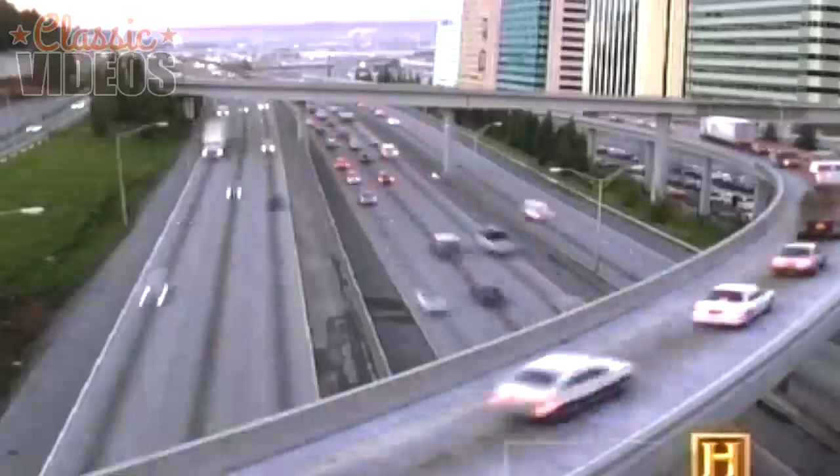If you live in a city, you drive by them every day, but you never have time to peek through the security fence. There's got to be 1,000 people working on them. How else could they go up so fast? How do they make all those parts fit? Who's responsible for what? If you always wanted to know what it feels like to straddle an I-beam hundreds of feet off the ground, or to run that massive tower crane, here's your chance to find out.

Because we're going to construct a giant of a building from the ground up. We'll see the step-by-step process, and investigate the rich history of technological innovation that got us from there to here. Because every big building today owes a debt of gratitude to the groundbreaking structures of the past.

And here, in the heart of Los Angeles, we'll meet the people who build one: tower crane operator, project architect, pipe fitter, bolt-up foreman. For these hard-hat warriors, it's time for their close-up.

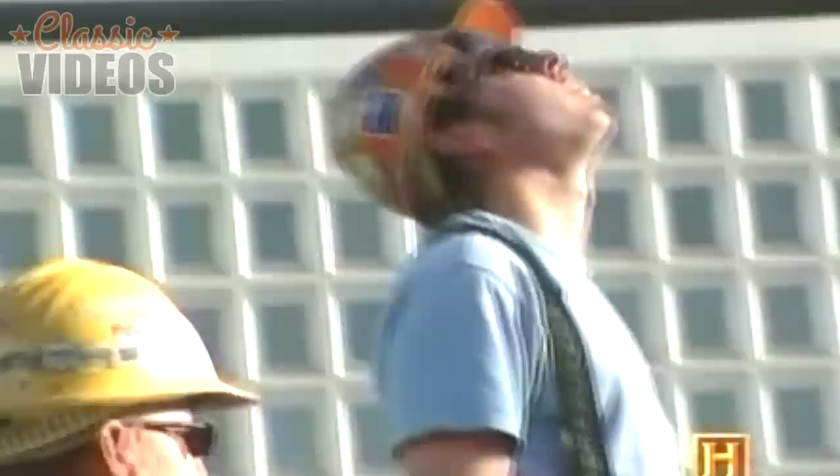It's very dangerous, very dangerous. Dangerous enough, you make a mistake, you could die. As the building's going up, there's bound to be some trouble.

Let me spell it out to you. Grab number 1 right here, put number 2 right here, so I can get 1 and 2 in order here. And here we go.

Despite the road bumps, Bobby, the man-lift operator, is on hand to lift their spirits. This is a man-lift operator's life. You're always getting loaded and you're always having your ups and downs.

From the iconic Art Deco towers of the 1920s and early 30s to the shimmering monoliths of today, skyscrapers represent more than a collection of concrete, steel, and glass. The skyscraper defines our cities. The skyscraper is a symbol of power, ingenuity, innovation, and will.

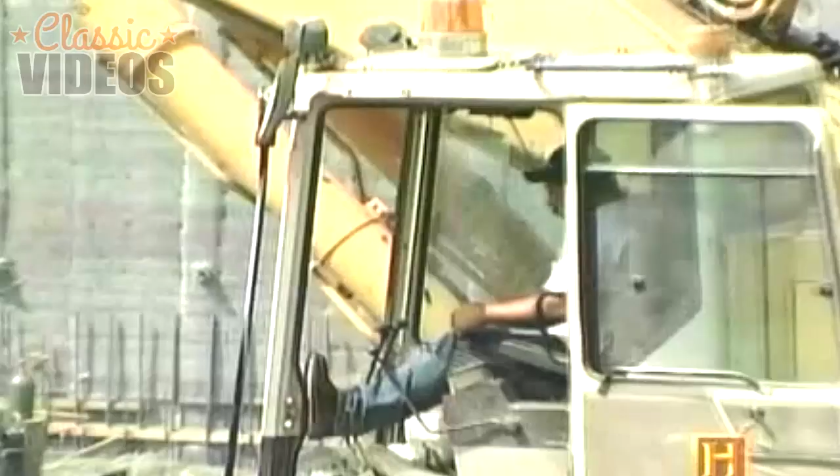A skyscraper is like a test bed. It's a place where we work out new technologies, new ideas, new construction methods as we try and build ever taller and faster and cheaper. And the structure we're building is no exception.

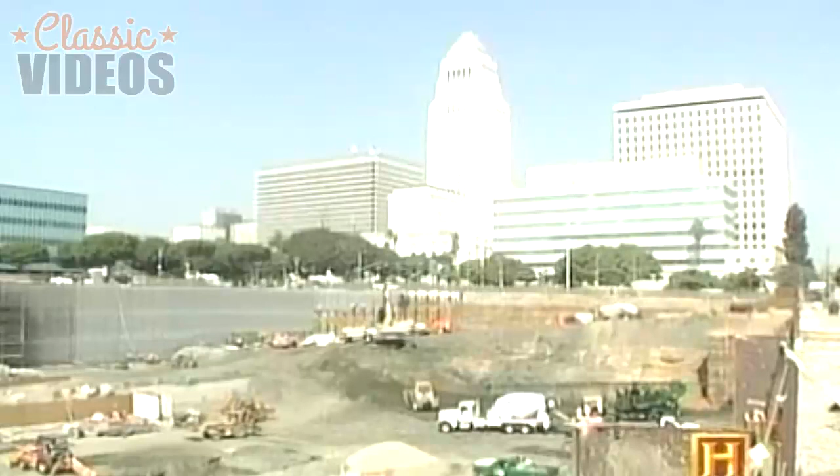In May of 2002, the Clark Construction Group, the builder and general contractor, broke ground on a $174 million project in downtown Los Angeles. The task: build a 750,000 square foot office building for the California Department of Transportation, or Caltrans. The building will take up an entire city block.

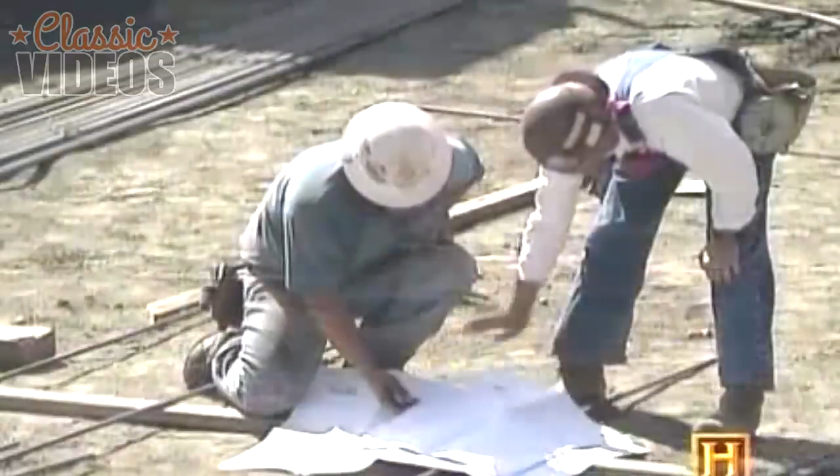And although it'll rise a relatively modest 13 stories above ground, with 4 stories of parking below the plaza level, constructing it will present the same architectural, structural, and mechanical challenges as larger buildings. Clark Construction has 27 months to complete our office building.

We have the address, the huge 100 here, but this will all be... In the fall of 2001, Thom Mayne and his design team from Morphosis Architects are in the midst of a heated competition for the Caltrans project.

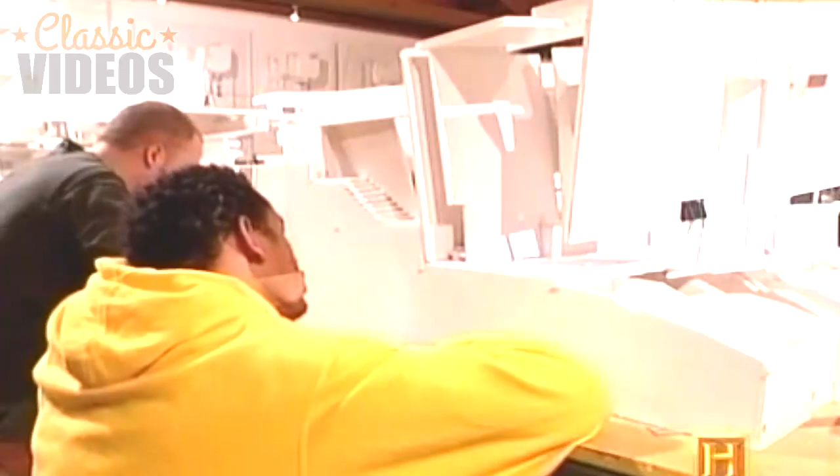You put a huge amount of energy, and I'm talking about kind of emotional energy, not just intellectual and creative energy, but you get really involved in it personally. When you're done, you can't even conceive not winning.

For any competition, the developer gives rival architects a set of parameters called a program. It might include the amount of space desired, the intended usage for that space, and the budget. It's the architect's job to take these abstract concepts and numbers and fashion them into a workable building.

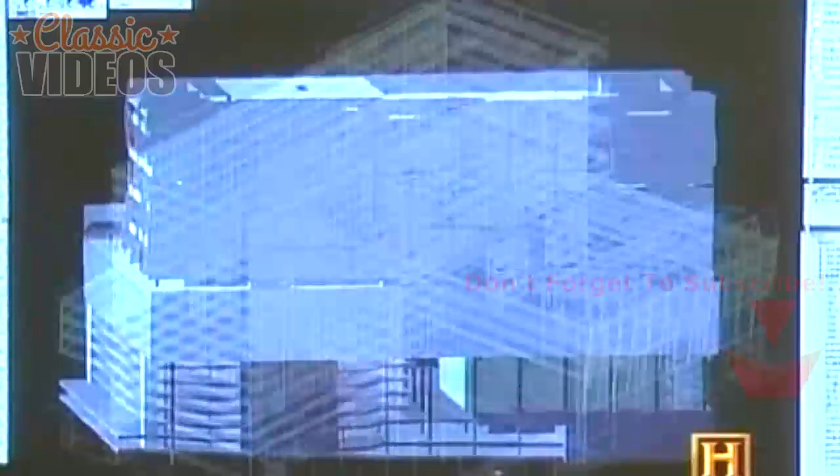Designers use every tool in their box. The image is always the architect that is drafting for it, which is kind of an old image. It's all computer now. In the computer, we can do a model and rotate the model around, see it from any angle that you want to see it from, render it or shade it, so that you can see kind of the surfaces more like you would see a traditional model.

And it doesn't have to stay in the computer. This machine can take this and that and turn it into this. It's called a 3D printer, and it works similar to your inkjet at home.

A model starts out as a heap of plaster powder, which the printer spreads into a thin layer. The print head runs back and forth across the powder, spraying glue instead of ink, creating a cross-section. When it's through with one layer, the printer drops the base a fraction of an inch, spreads another bed of powder, and sprays more glue.

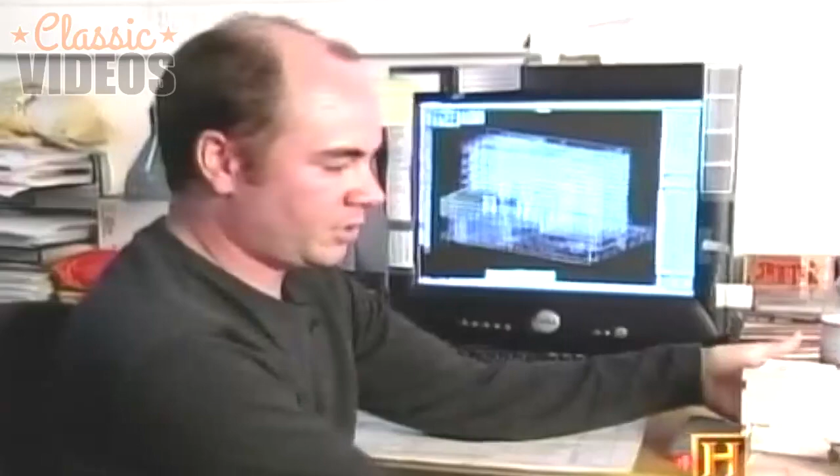Eventually you end up with a kind of cylinder of plaster that you can vacuum out the excess, and you're left with a three-dimensional model you can discuss with the team. The 3D printer quickly renders concepts, but they're just to stimulate debate. For the actual competition, designers will spend hundreds of hours making detailed models with paper, plastic, and glue.

Others on the team will work on the guts of the building. If they win the competition, Morphosis will eventually lay out every detail, every column, every window in the form of extremely detailed drawings or construction documents.

The set of documents can be 300 to 400 pages, and they're constantly changing. Designing is not just making one decision after the other, it is making a whole bunch of decisions together, and they all have to work together.

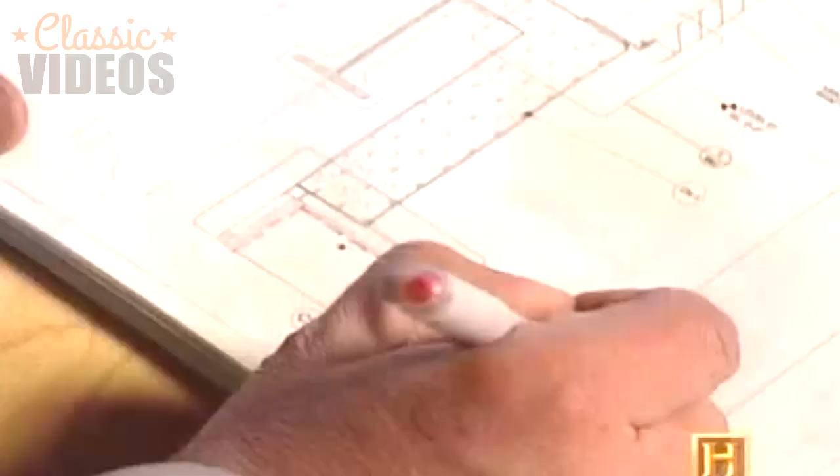Architects don't work in a self-indulgent creative vacuum. They're governed by planning codes, structural engineering limitations, the needs of the client. You can either have moving exhibits, but you're going to have a very large archive of these fine art photographs.

And, to the frustration of many architects, the budget. The architect also consults a series of additional specialists, like the structural engineer, who designs the support framework of the building, and the mechanical engineer, who figures out how to air condition the building.

Architecture, like watching a child growing. A parent can want them to go this way, and maybe a little bit this way, and maybe they go that way, and finally they're just their own person.

On November 12, 2001, Morphosis gets word from Caltrans that it has won the competition. I think it's going to be pretty interesting. Now, like any other high-rise designer, Morphosis architects have to produce the mountain of construction documents that a builder can turn into a structure.

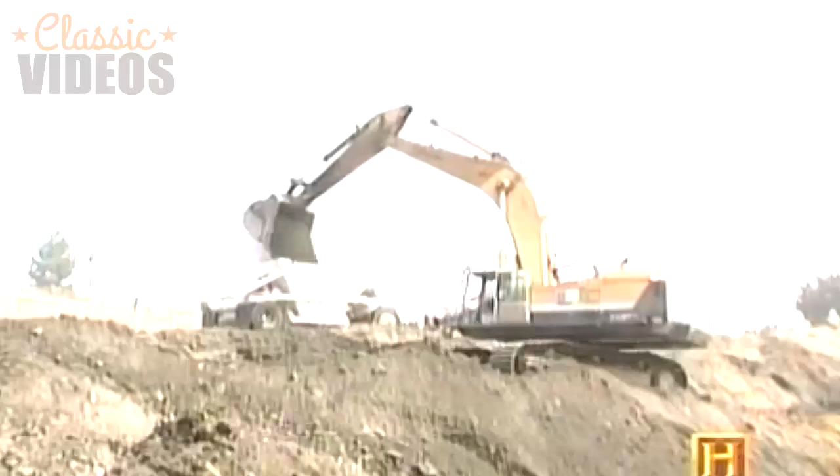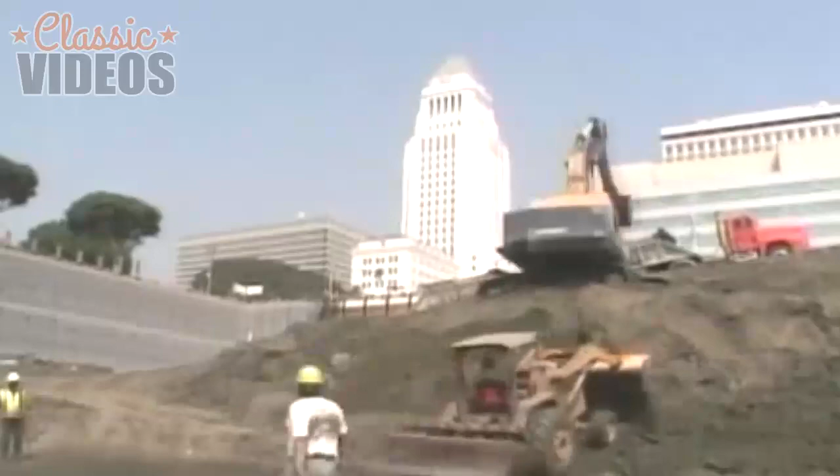Ready? Let's go. It all starts with digging a massive hole and shooting some concrete. Yep, it's gonna get messy. Before the Caltrans building or any large building can go up, it's got to go down. More than a cliche, creating a solid foundation is essential.

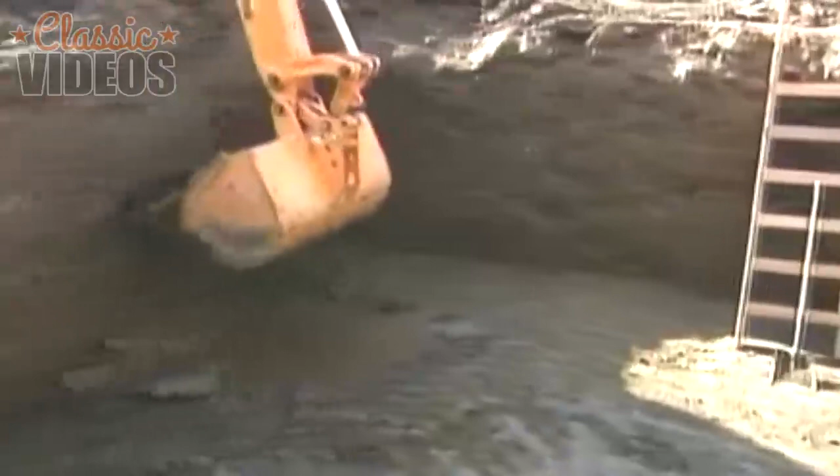This building will be supported on spread footings. Spread footings are basically a rectangular or square concrete block, in this case about 18 feet by 18 feet by 4 foot deep, that support the structural steel columns. The Caltrans steel superstructure will weigh 13,000 tons. But fortunately, rock near the surface can carry the load.

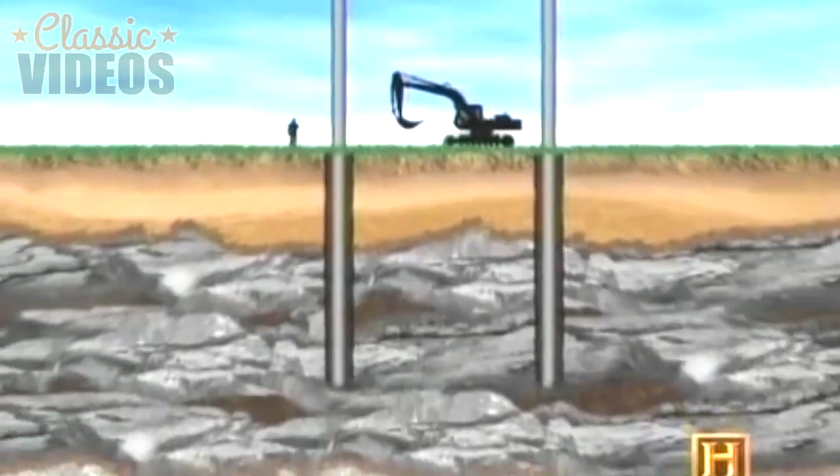When a site has mud, soft soil, or weak rock, a builder might have to drive piles, pounding long pieces of concrete or steel down to bedrock. Piles won't be necessary for the Caltrans building. But before concrete pouring for the footings can begin, builders have to dig the hole. It's the pit on top of which the building will sit.

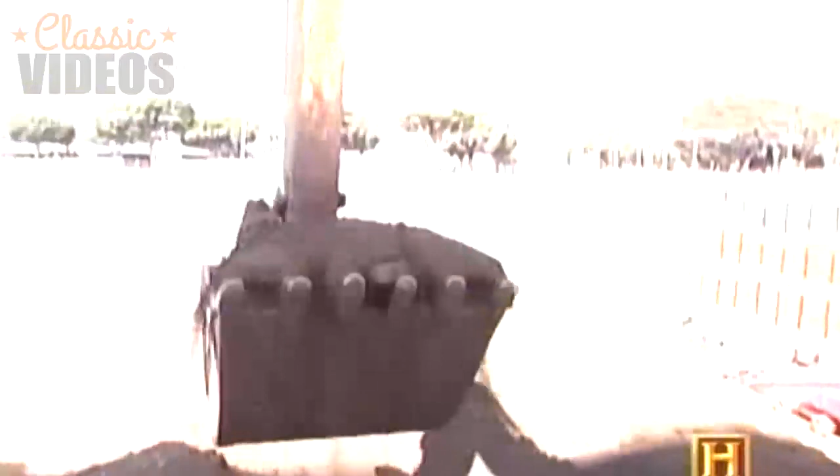To get the digging done, the excavation subcontractor uses specialized tools: giant excavators, bulldozers, semis, and a paleontologist. I'm a field paleontologist, and it's my duty to find fossils, recover them, and bring them back to a museum.

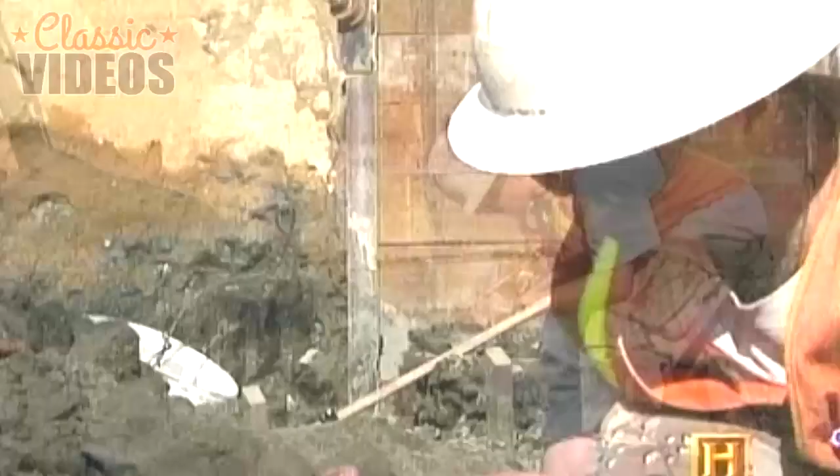It's a requirement in most states that a specialist like Conrad be on hand during excavation, in case artifacts are inadvertently uncovered. Here, a backhoe becomes a time machine. Some of the interesting fossils we have found have been great white teeth. This is a fossil great white shark, approximately 3 million years old.

But a big find is often the last thing a construction company wants when they're fighting a deadline. One of the biggest construction-related finds happened in 1991 during excavation for a new federal building in Lower Manhattan. Builders uncovered hundreds of burials from an African cemetery, halting construction for several months while archaeologists excavated the remains.

It's essentially like a big treasure hunt. That's what keeps the drive and the interest going. You know, you're going to find that one awesome site that's going to make you famous.

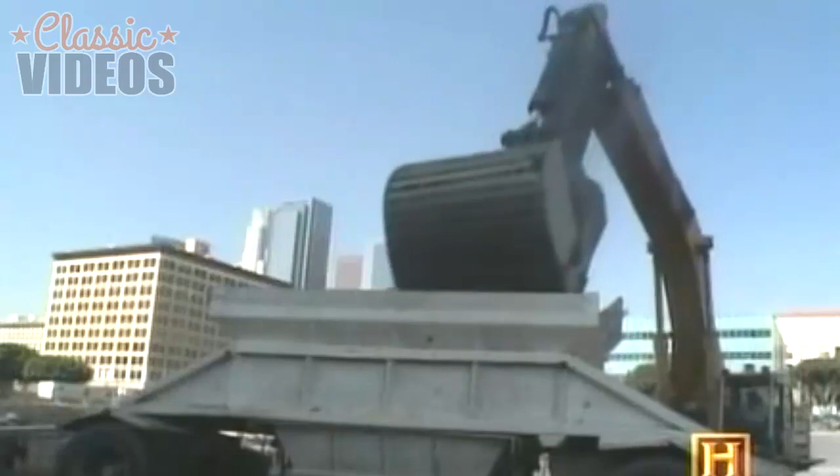Even at the excavation stage, this project takes an enormous amount of planning and coordination. That's where the general contractor comes in. On this project, that's Clark Construction.

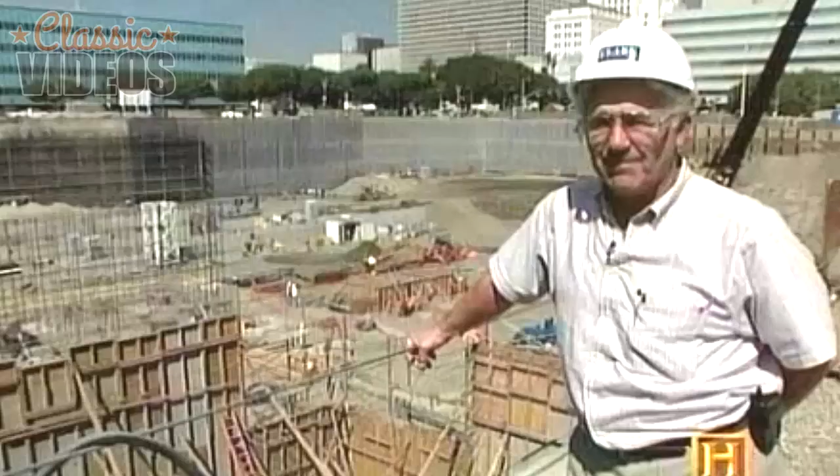This represents the true schedule for the project. There are over 5,000 activities. Each of these events has to happen in a particular order within the context of the construction of the job.

I don't know why this can't be done. Is there any reason this can't be done? Absolutely not. Can you kick them and get them done?

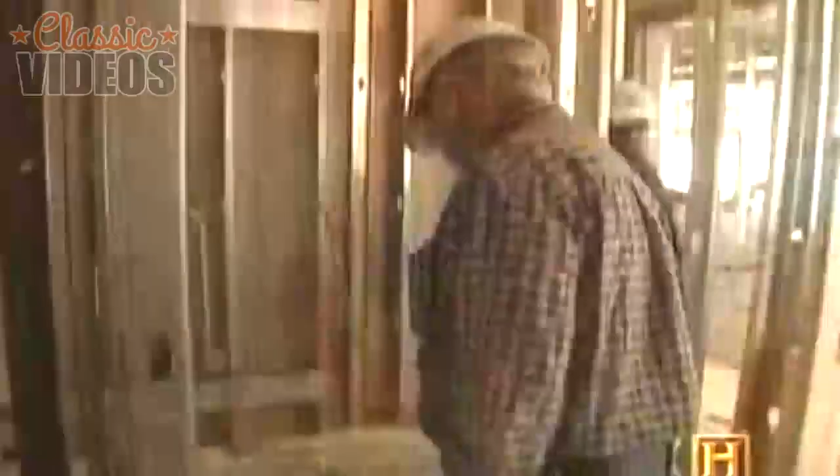How you doing there, Sparky? Pretty good. And that ladder says you can't go on the last 2 steps? Almost every ladder I've ever seen, you're close to a shaft. I'd hate to see you go down.

The general contractor is like a big traffic cop, and sometimes one of the subs needs some direction. Two weeks ago, they said there's no problem. Well, if there's no freaking problem, why isn't this done?

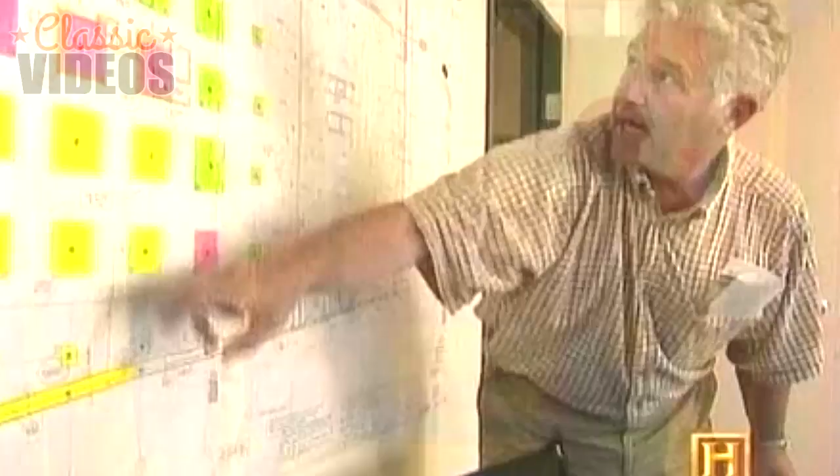The general contractor always has a lot at stake. He's promised the owner his company can construct a building by a certain date and for a certain amount of money. In this case, $174 million.

The first scheduled move-in date is August 12, 2004, only 18 months away. Adding to the pressure, Clark Construction faces penalties of $25,000 for every day past their promised completion date.

Most large construction projects do have penalties involved with them. Obviously, a building needs to be rented, leased or used, and the user needs to know when he's coming in, and it costs money to rent a building someplace else, so this building has to be done on time.

We will be on schedule no matter what it takes. We will make it happen.

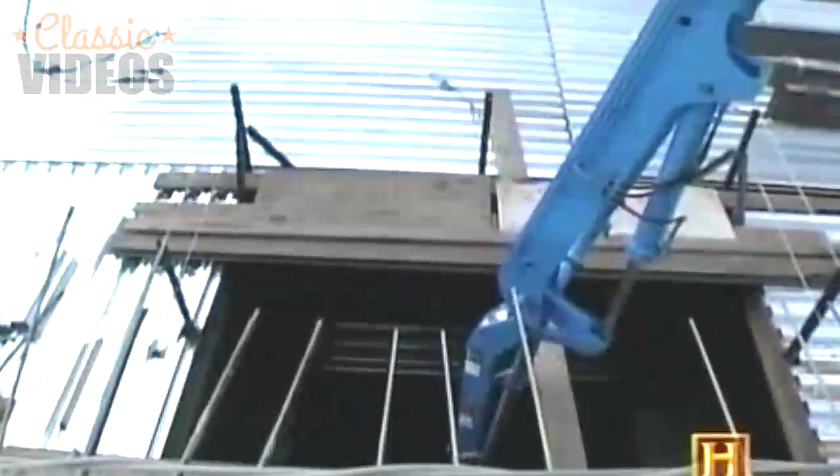After the excavation company has removed 200,000 cubic yards of dirt, the concrete subcontractor comes in next. This project will take 36,000 cubic yards of concrete for the foundation and floors.

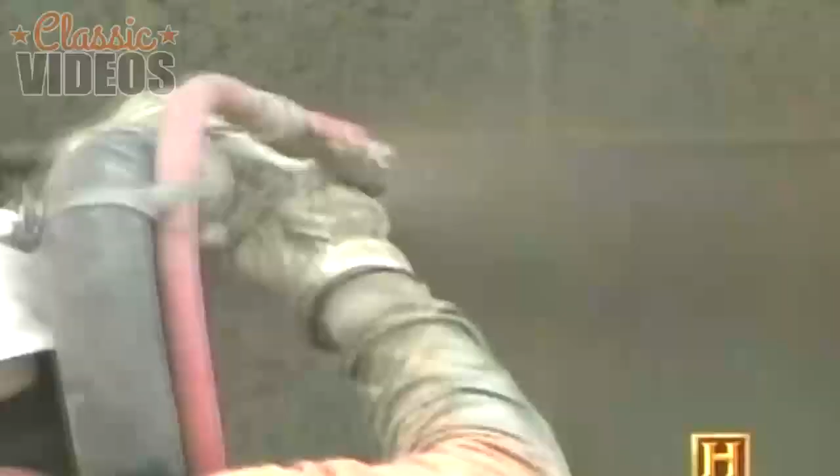There's a few different ways to place concrete. One is you tailgate it out of the back of the truck. Another way is you pump it into a form or into place with a concrete pump. And then there's what is called a shotcrete pump, which is this application here. Shotcrete is where it's actually blown onto the wall with high air pressure. It's a lot faster to install.

Modern construction couldn't do without the magic concoction of sand, aggregate, water, and cement.

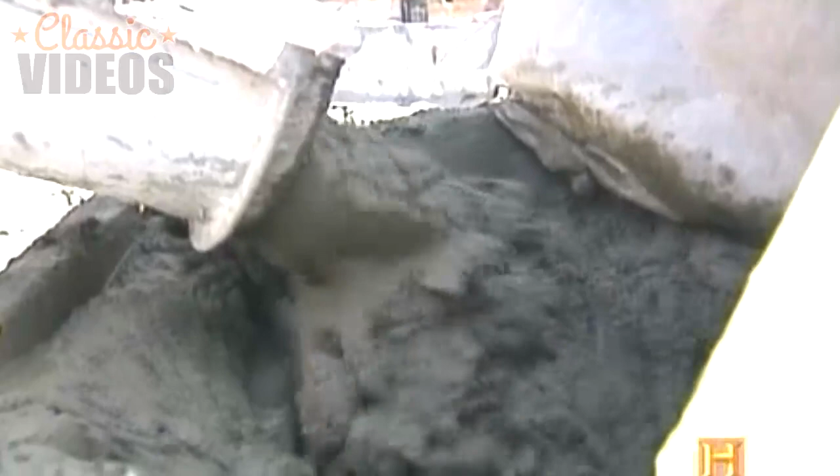Although cement mortar dates back to at least the Romans, modern concrete construction wasn't possible before the invention of Portland cement in 1824 by Joseph Aspdin of England. He burned and ground together a mixture of limestone and clay, creating modern hydraulic cement. It hardens with water and gets stronger with time. By 1900, engineers were using concrete to construct bridges, streets, and buildings.

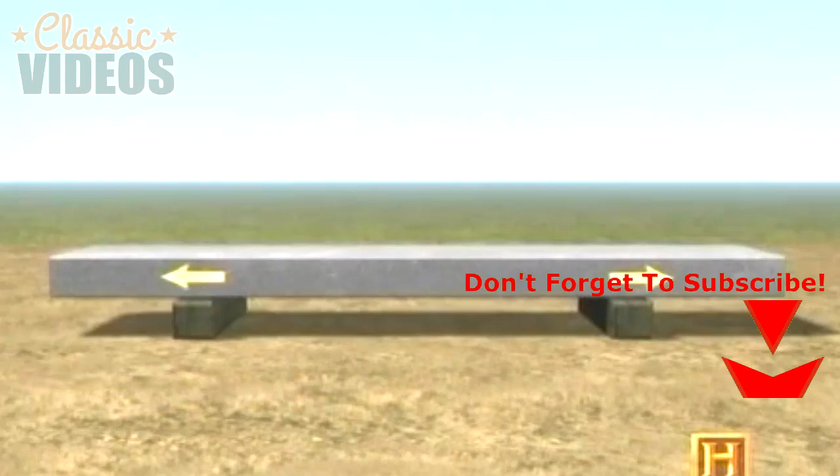To make concrete stronger, builders started embedding steel reinforcing bar, or rebar, into the concrete. Concrete performs well under compression, but not as well under tension. Steel, on the other hand, performs much better under tension. So the two together, the concrete and the reinforcing steel, will then resist both compression loads and tension loads. Builders use reinforced concrete in foundations, walls, floors, and sometimes structural columns.

These guys make it look easy, but concrete can be exceptionally tricky once in a while. Concrete is like a woman. You have to be patient with it. It sets up at its own pace, and it's not very agreeable at times.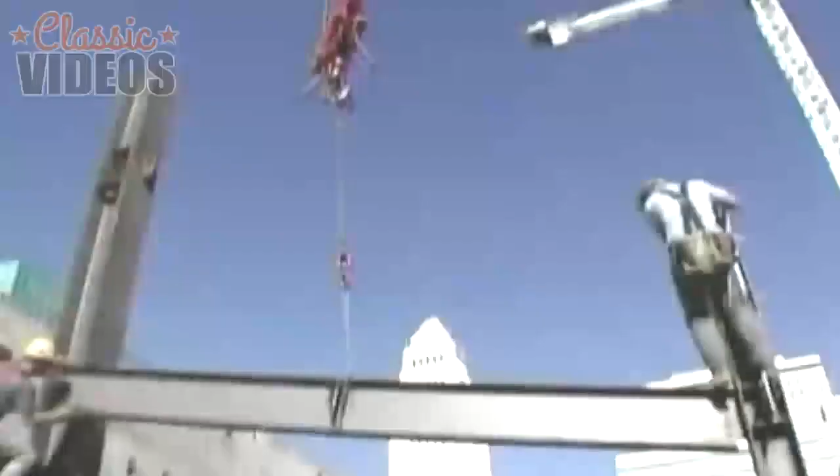After the foundation work, it's time to bring in the real men of steel. The high wire act is about to begin. What can you do with 13,000 tons of steel? Well, you could produce 17,000 SUV bodies, or 280 million soup cans, or our downtown LA behemoth.

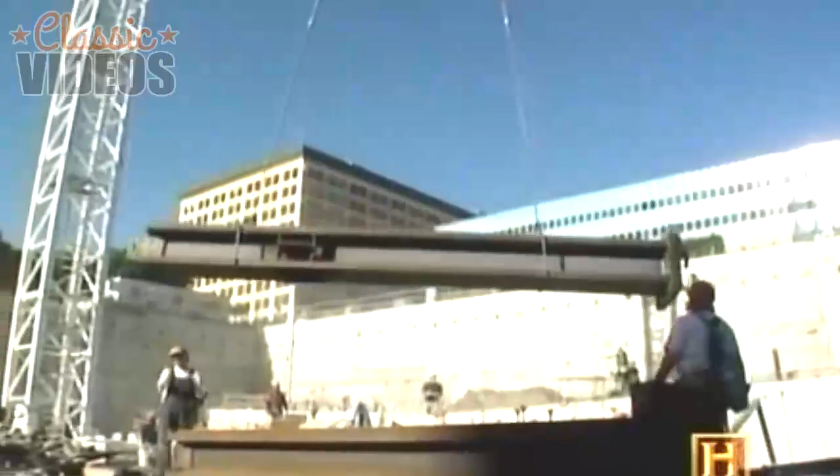Now that the foundation's set, it's time to erect the skeleton. Large buildings are supported internally by a steel or reinforced concrete framework. And the first steel to go into a building is always a big event. There's a charge in the air as spectators watch the tower crane swing the first steel column into position.

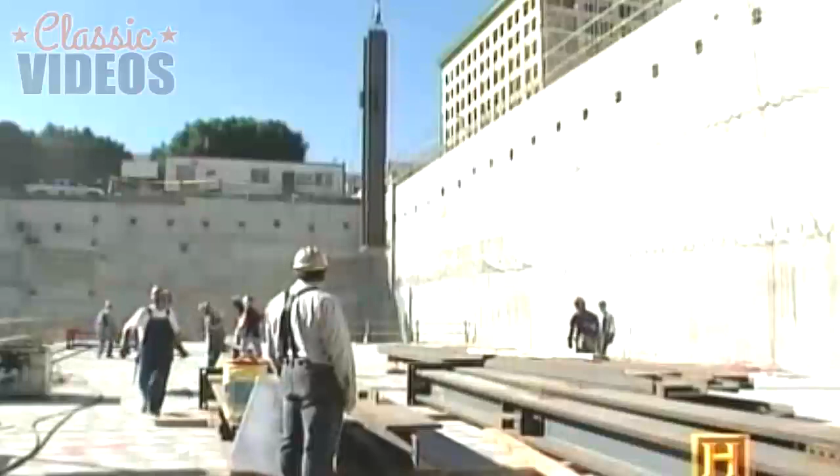Hey, their hole isn't big enough over here. Their concrete hole isn't big enough. Oops, right one. 3014, come down a little, Dino, and see if we can get it wedged in there.

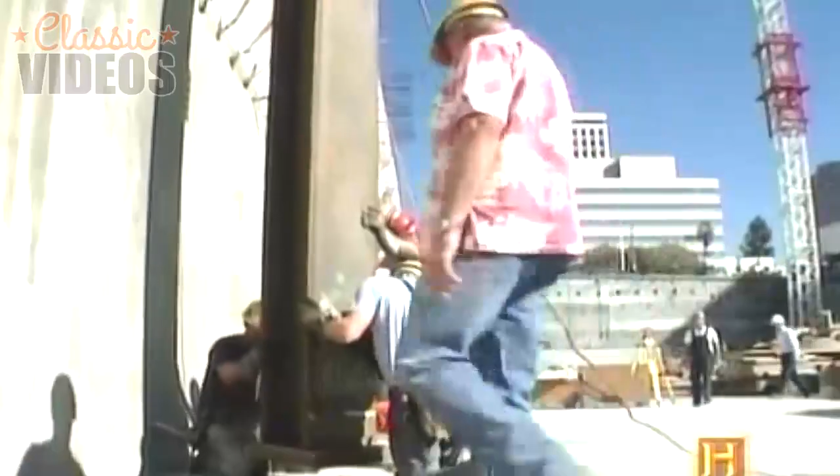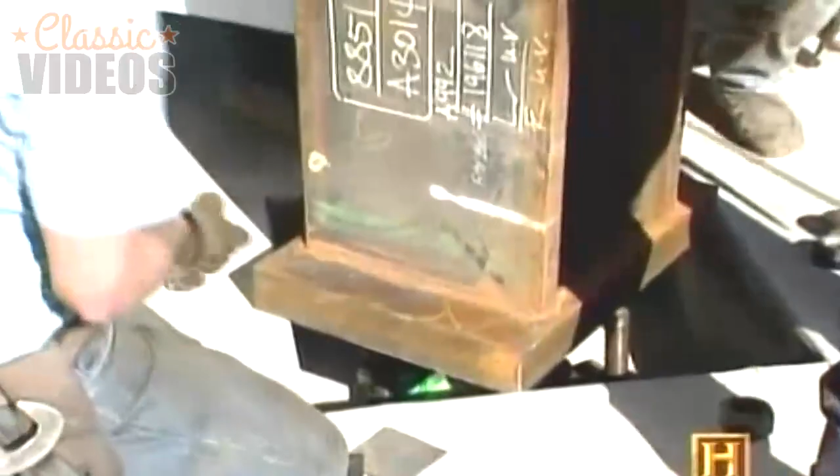This is the very first column, and you've got a problem. When you start a job off and have a problem right at the beginning, you wonder what the rest of the building's going to be like. The template used during concrete pouring was smaller than the actual column.

Nothing a jackhammer can't fix. And in a few minutes, the first column drops into place. One down, 7,125 pieces to go. Fortunately, there's just a few holes needing enlargement.

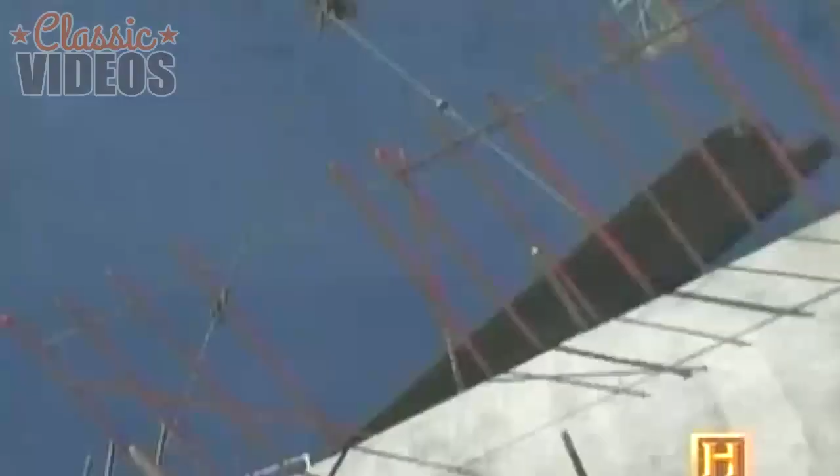In no time, steel's a-flying. We basically have four separate gangs. The first one is the raising gang, and they're responsible for erecting all the structural steel. Then we have the bolt-up gang, which is responsible for bolting it all. Then the plumb-up gang comes by, and they're the ones that plumb it. And we have the welding gang, which, after all the bolting's done, they go ahead and weld it.

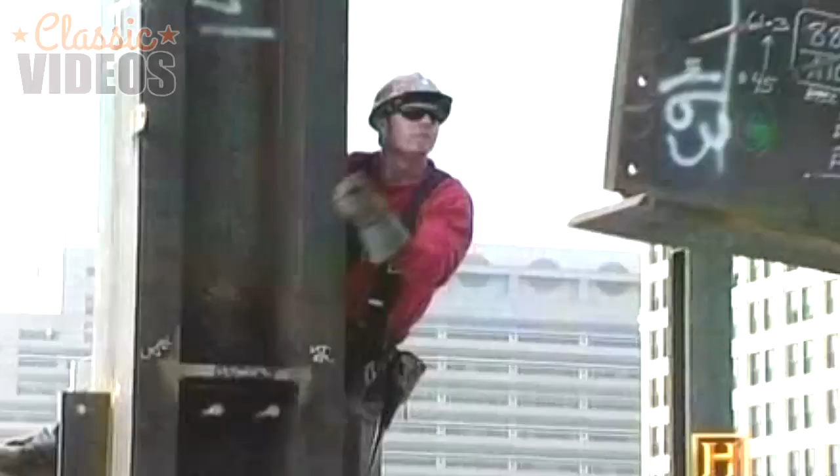By most accounts, the two connectors, who are part of the raising gang, have the most difficult and dangerous job on the site.

The connectors are the ones responsible for joining all of the steel together. Every stick of iron you see here is put up by two individuals and a crane. The piece comes in, we're supposed to put two bolts in on each end, one's supposed to be wrench tight, and then they come afterwards and put all the bolts in. Our job is just to get the iron up as fast as we can. You don't get to make a lot of mistakes in that part of it. So, you know, these guys are always on the edge all day long. You just don't look down. You just do your job and you go home safe. Go home to your family.

For more than a century, it's guys like these who've risked life and limb to build metal monuments across the country.

The ironworkers' trade really begins with the construction of bridges. Bridges are the structures which are most technologically challenging in the late 19th century. The profession attracted independent spirits, daring types, who either conquered their fears or weren't born with any.

But one group of people seemed almost predisposed for the high wire work: the Mohawks. Mohawks started building bridges in Upper New York State and Canada in the 1860s and 70s. They were really good at it, and the jobs were very good.

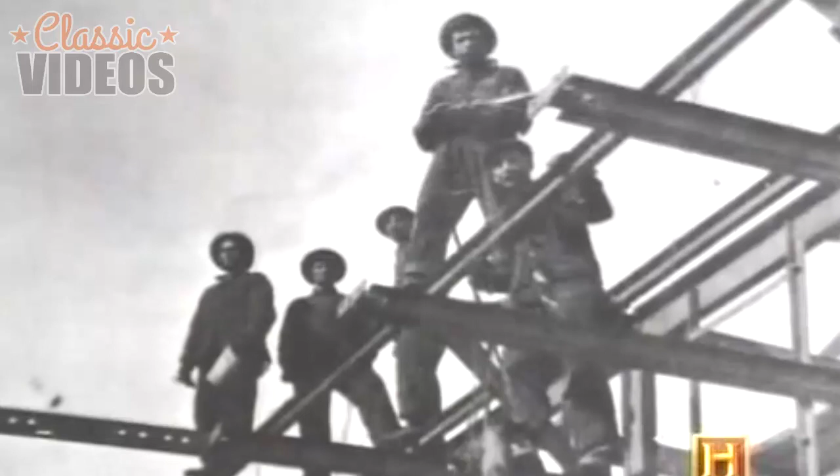Originally hired as day laborers, the Mohawks and other Native American groups quickly earned a reputation as exceptional iron workers. It became apparent to all concerned that these Indians were very odd in that they did not have any fear of heights. If not watched, they would climb up into the spans and walk around up there as cool and collected as the toughest of our riveters.

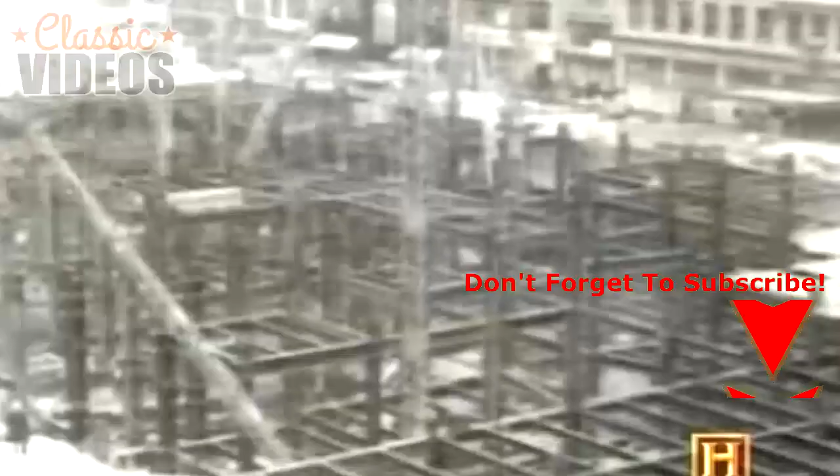When engineers redirected the technology of steel bridge construction vertically into skyscraper building, many Native American ironworkers continued in the trade, helping to erect iconic skyscrapers like the Empire State Building and the World Trade Center. Mohawk steelworkers still work on buildings today, and they're in at least their fourth generation. And this is true of other steelworkers too - the jobs get passed down from generation to generation.

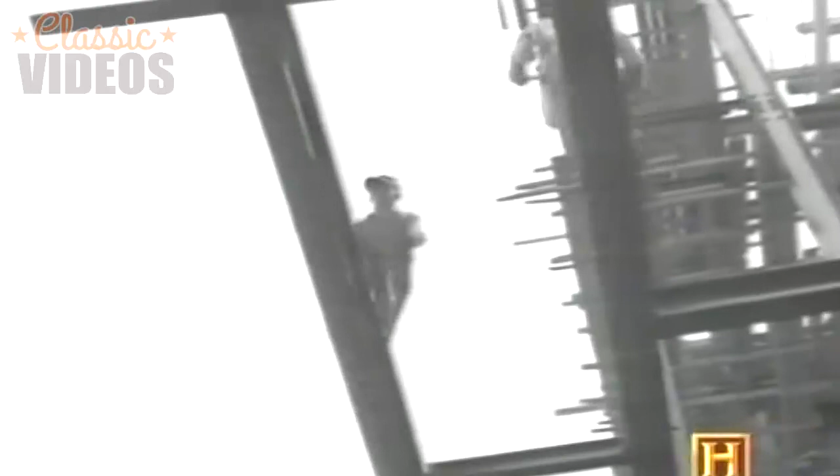But some of the legends about gravity-defying Native Americans and the high steel might have become bigger than the buildings they helped erect.

I think that there's a myth that suggests that all of the skyscrapers' frames were constructed by Mohawk Indians. It's true that some ironworkers are Native Americans. It's also true that some ironworkers are Irish Americans or Italian Americans. Ironworkers are very diverse, just as America is a very diverse place. And they played an important role in building skyscrapers and bridges in the city, but they were probably no more than 10% of the workforce at any one time.

But 10% of the workforce is worthy of Mohawk bragging rights, considering they're less than a fraction of 1% of the combined U.S. and Canadian populations.

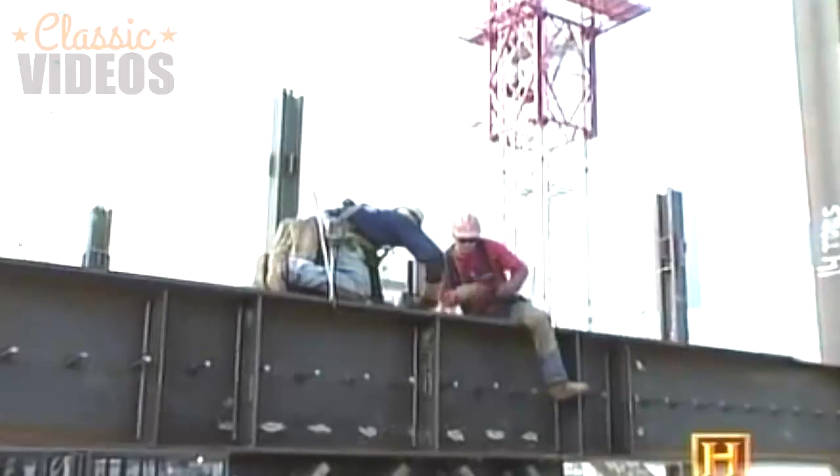On the high steel, it doesn't matter what the iron worker's ethnicity. What counts most is teamwork and good communication. You gotta have a partner, and you gotta be able to work together, because if he does something dumb, it's gonna get both of you hurt or one of you hurt. So you gotta be right on the same page the whole time and know what each other's doing. I work with him great. We get along perfect, me and my partner.

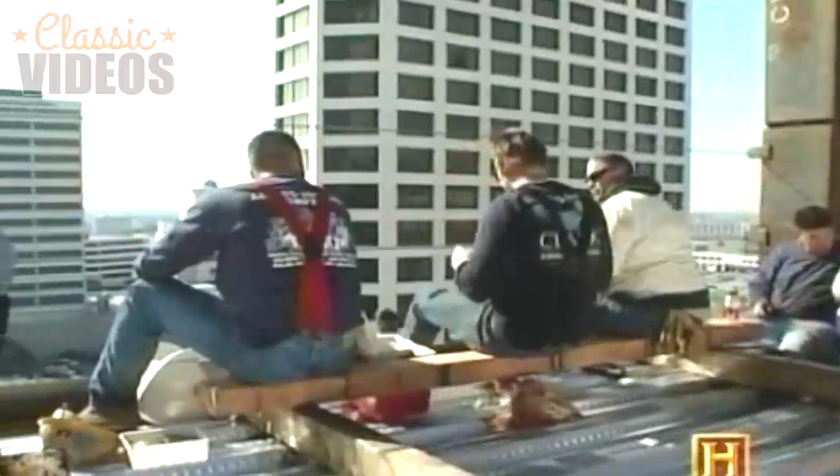Working in a high-risk situation, a raising gang has to develop a strong sense of trust. It's this sense of camaraderie that holds this building together. That and about 89,000 bolts. Usually got a couple guys stuffing bolts behind the raising gang, and another two guys tying up the bolts behind the plumb-up gang. Before the mid-1950s, builders used rivets to hold connections together.

A riveting gang consisted of a heater who made the rivets red hot. With tongs, the heater tossed each rivet to the catcher, who used a tin can to make the grab. The catcher struck the rivet against a beam to shake off the glowing flakes and rammed it into the hole. The bucker-up held one end, while the gunman pounded the rivet with a pneumatic hammer.

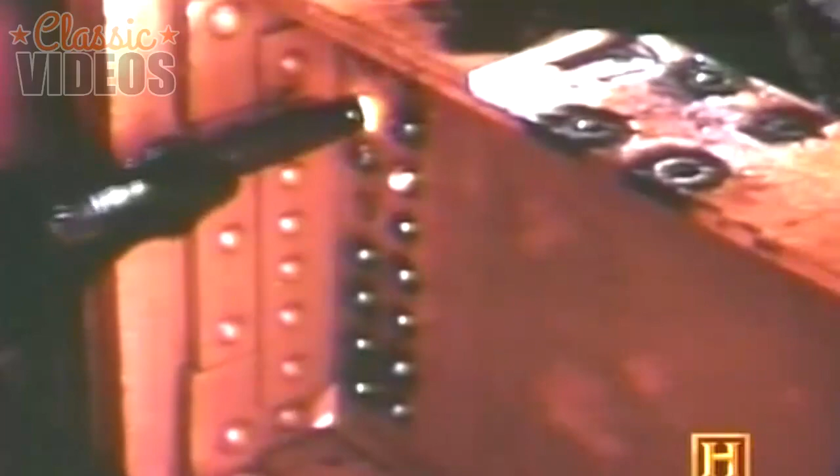While an experienced riveting gang could drive 500 rivets a day, in the mid-1950s, builders started using bolts, which were just as strong as rivets, but faster to install. They also required fewer laborers.

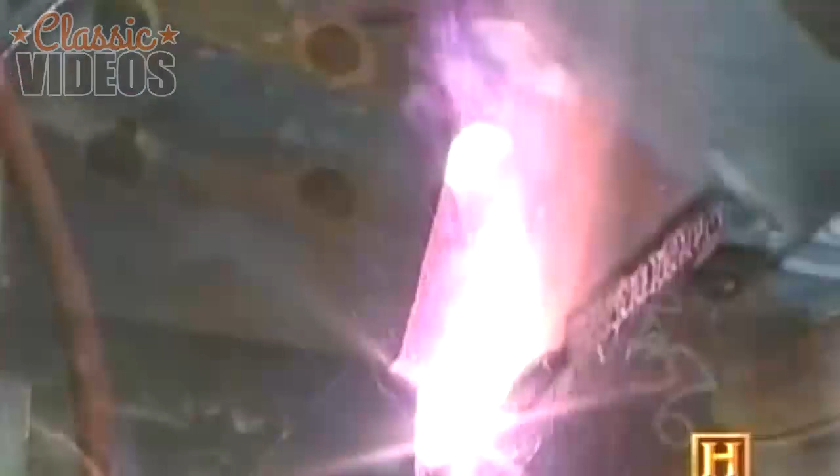Iron workers on this job bolt and weld the joints to create a rigid skeleton. It was the invention of the internal steel skeleton like this that sent skyscrapers soaring more than 150 years ago.

Before the 1840s, the weight of the floors in most multi-story buildings was supported by the exterior load-bearing walls. But engineers were restricted on how high they could build because the walls at the base had to be very thick to support a tall structure.

In 1848, James Bogardus introduced a way of supporting a building not by its exterior walls, but from within. So instead of having a masonry pier in the middle of your building, you'd have a cast iron column. Instead of having a masonry exterior wall, you'd build a cast iron wall. In the late 1800s, engineers started using steel, which was stronger than cast or wrought iron.

This new cage or skeletal construction offered many benefits. The load of the building was distributed equally over the internal frame, instead of entirely by the exterior walls. This allowed for taller structures with larger windows, thinner walls, and therefore more rental space.

Then all the pieces were in place for the birth of a uniquely American style of architecture. The first building to employ steel cage construction was the Home Insurance Building in Chicago, designed by engineer-architect William LeBaron Jenney. Built in 1885, many scholars consider the Home Insurance Building to be the world's first skyscraper.

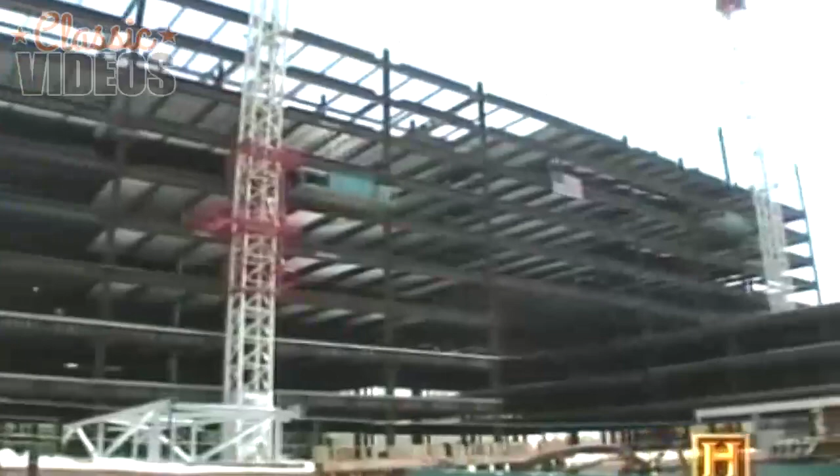The Caltrans building is also starting to climb. The iron workers are making fine progress. Then, three months into steel erection, one event rocks the job site, underscoring the hazards of the profession.

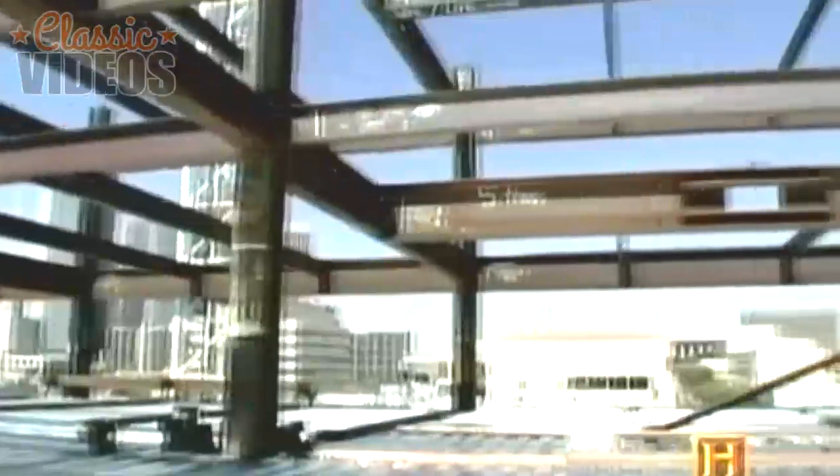A very unfortunate accident where a young steelworker fell and was killed, and it's really upsetting to me and the staff and to the other people who worked on the project that a young man had a very tragic accident and lost his life. Despite all the safety mechanisms being in place, such as safety cables and nets around large openings, Michael Jesus Del Rico fell 4 floors to his death. He leaves behind 2 daughters.

We're going to go ahead and get started with safety as usual. Zach's going to be working with Corey on safety.

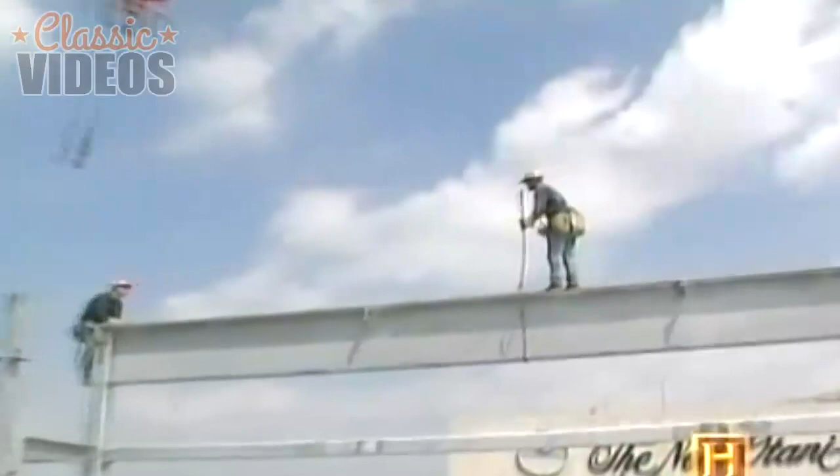Even in the era of OSHA regulations and safety inspectors, construction has the highest number of fatalities of any industry classification, accounting for around 20% of total work-related deaths. Sadly, this monument has also now become a memorial.

It's 6 o'clock in the morning when Rick Fuller climbs the 289 steps to his office in the sky. Rick operates a giant tower crane, the biggest tool on the job, and one of the most important.

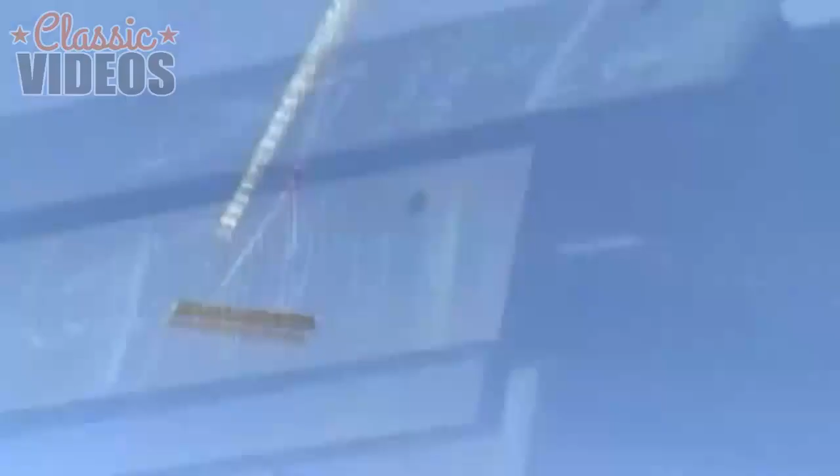There's lots of people on the ground under us. We're pretty much responsible for looking out for anybody that's under the load and keeping the load from hitting anything while it's in the air.

Rick controls the crane with 2 joysticks. The lifting is done with an electric motor, which spools the 1-inch steel cable in or out like a fishing reel.

Well, the crane operator, he's got to trust us, and we got to trust him, because if he messes up, we're dead pretty much, or someone's going to get hurt. From where I'm sitting, people look like ants on the ground.

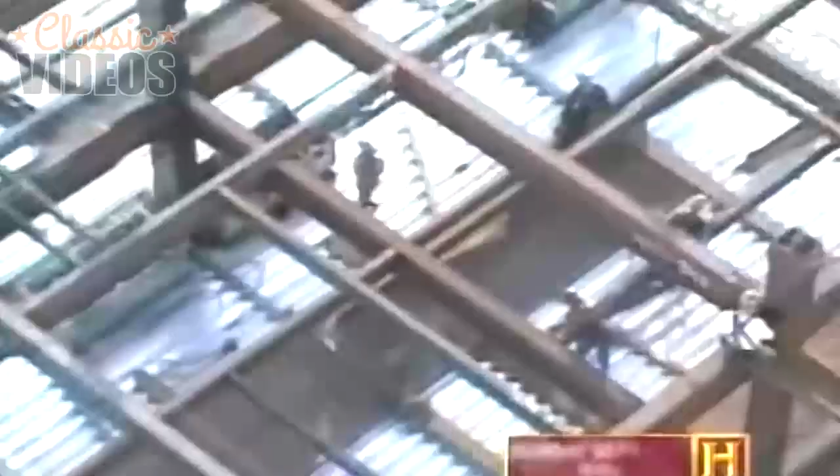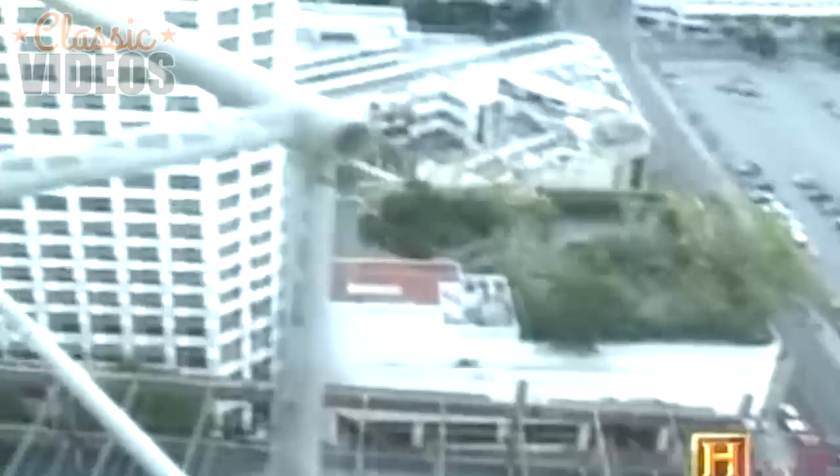The crane doesn't operate in high winds. Still, it bends and flexes, even with normal loads. It can move as much as 1 foot side to side. A little disconcerting when you're 300 feet in the air. 'Yeah, you try not to think about it. It's all these gray hairs. I wasn't gray before this job started.'

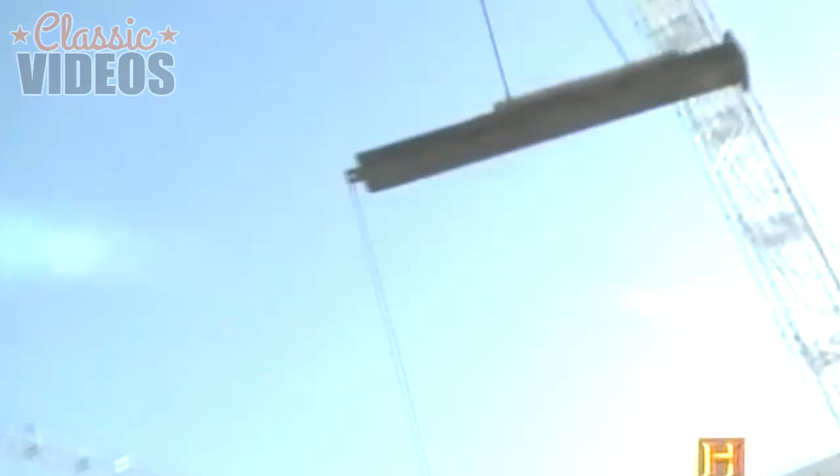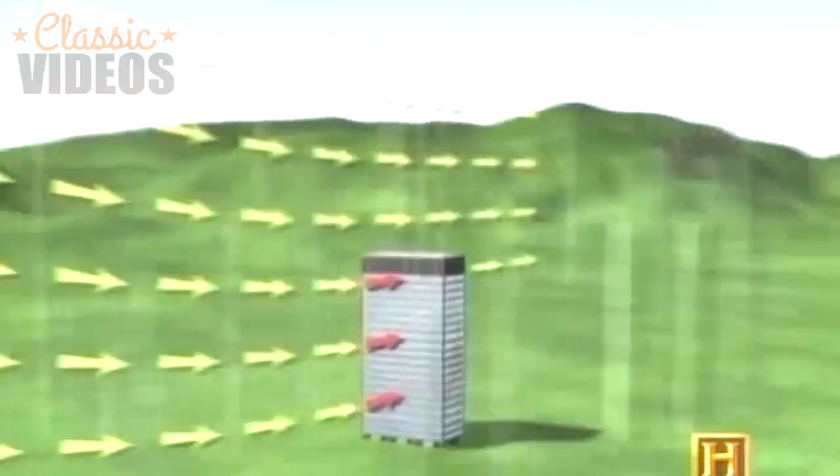The forces that act on a building, of course, is the vertical load, which is from the load of the building, as well as the occupants and the contents of the building. We call those gravity loads because they're acting downward vertically. Then we have the horizontal loads, which can be either wind loads or earthquake loads. The bigger the surface area of the building, the more wind load that building is going to be taking. If a building is too flexible, wind can cause large swaying motions.

If a building is light, the swaying can be relatively fast, and the combination can make occupants seasick. Buildings with larger members, more rigid connections, or more braces are stiffer and don't sway as much. Buildings that are heavier sway more slowly, creating an easier ride for occupants.

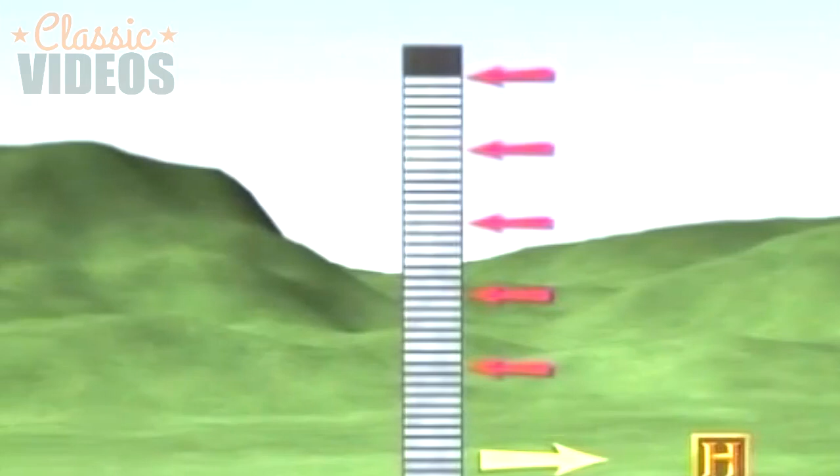Stiff sounds great if you're worried about wind and tenant comfort in windy conditions, but stiff is not such a good thing when dealing with earthquakes. In an earthquake, when the ground moves, the building is left behind and then catches up. The stiffer the building, the more force it attracts. The structural engineer must therefore choose the best framing style for the building's specific location.

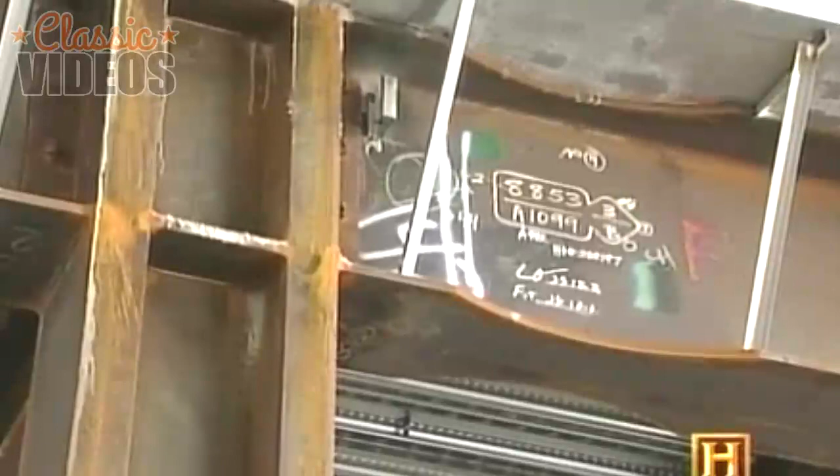There are a few telltale signs the Caltrans building is going up in the heart of earthquake country. Designers actually engineer structural weak points, called dog bones. Those notches are there so the engineer knows where the beam will buckle in an earthquake. With the dog bone in place, the columns should not be damaged, so the building will be able to stand safely after an earthquake. The beams may be damaged and may have to be repaired, but again, the building will be safe for the occupants to exit.

Beyond the seismic features, the framing of the Caltrans building is essentially the same as the first steel cage buildings.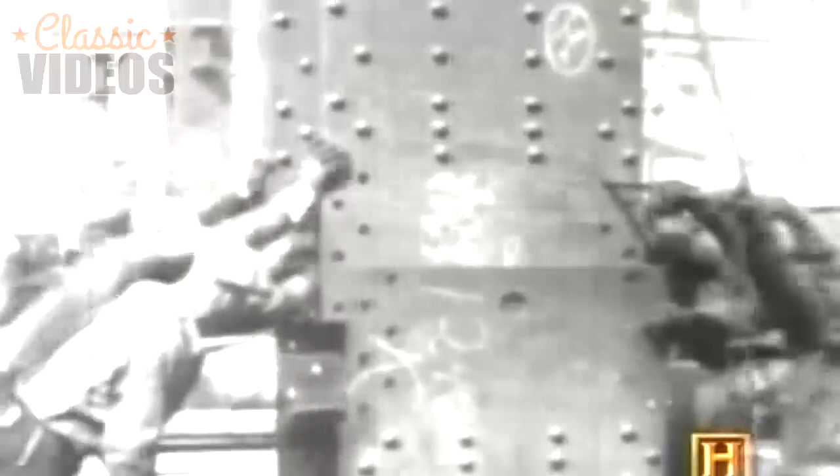The Empire State Building was the high point, metaphorically and physically, of this kind of construction. Built in 1931 and the tallest skyscraper in the world until 1972, it was also a very heavy building. Iron workers erected 60,000 tons of structural steel, and the limestone and granite cladding also added weight. The combination of weight and rigid connections made the building very stable, even in high winds.

But in many ways, the iconic skyscraper signaled the end of an era. The high-rises built after World War II came to embrace the international style, which celebrated the austere beauty of metal and glass. Construction materials, including steel, became lighter and stronger. But structures built with lighter materials risked becoming too light and flexible.

To stiffen structures, engineers started adding diagonal bracing around the internal vertical cores of buildings. If you were to take some popsicle sticks and glue them together, with a lot of glue on those joints, obviously it's more rigid. And if you then add some diagonal members to it, you can see it's even more rigid. That's the way to resist the horizontal loads.

A more radical approach introduced in the late 1960s was to move the bracing to the exterior of the building. The perimeter brace tube system was most famously used on the John Hancock Center in Chicago, Illinois. Everyone in Chicago can see these giant X's marching up the side of the building. Designed by the innovative engineer Fazlur Khan of Skidmore, Owings & Merrill, the John Hancock Center is a departure of sorts from traditional skyscrapers.

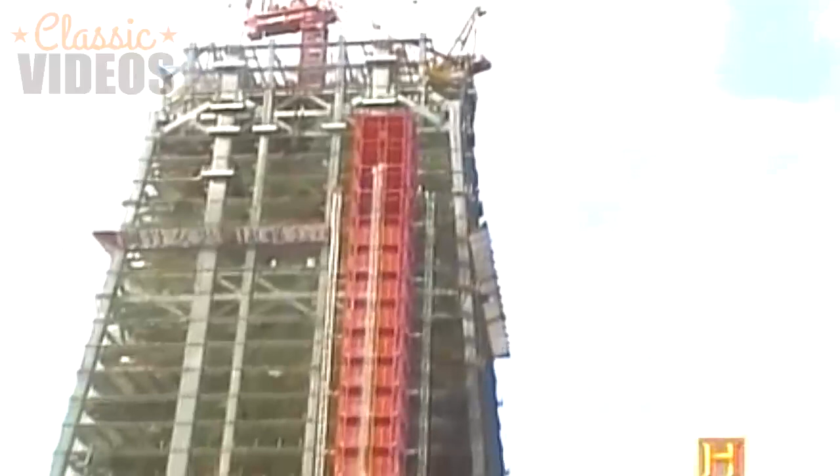Engineers working with architects are always balancing how tall, how wide, how many columns, how big a window, how fat a column, how deep a beam. It all has to be balanced. There's no one magic answer. But what if Mother Nature throws you a bunch of curveballs? How would you construct the world's tallest building in both a seismic region and one regularly hit by typhoons?

Builders of the new Taipei 101 face such challenges.

It's been 5 months since the beginning of steel erection on the Caltrans building. Because Los Angeles is in an active seismic zone, the steel members are more beefy than those used in similar-sized buildings in most cities.

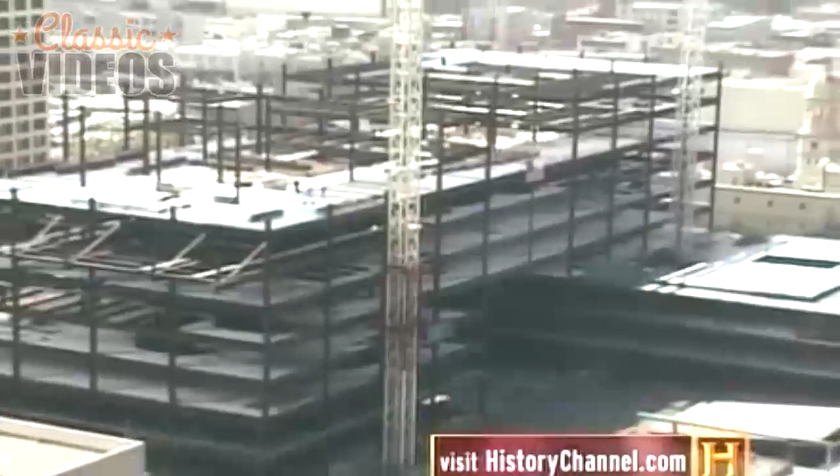However, some regions of the world have even more of nature's fury to contend with. In 1999, construction began on Taipei 101 in Taiwan. It would become the world's tallest building, but its structural engineers faced huge obstacles.

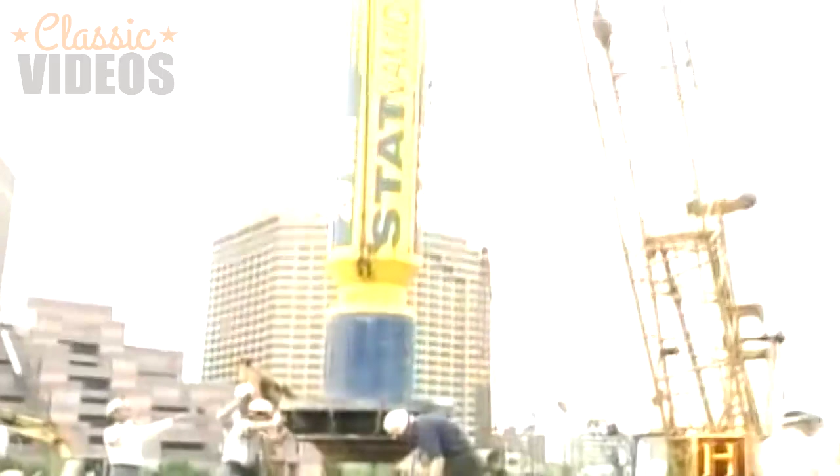Extreme earthquakes happen about every 50 years in Taipei and the Taiwan area, so earthquake design is the most important part of all structures in Taiwan. Taipei is also regularly pounded by very strong typhoon winds. A structural engineer would like to handle these two forces in different ways.

A light and flexible building is better at withstanding earthquakes, while a heavy and rigid structure better resists excessive wind loads. In Taipei, you have this situation - what do I do? Seismic had to be addressed first.

So they went with a building construction system that is light, using a steel frame system. Then they had to make it stiffer so it didn't sway so much. They did that with a braced core, but the building is so tall the core alone isn't enough stiffness, so they added outriggers - horizontal trusses that reach out every 8 floors and grab outside columns.

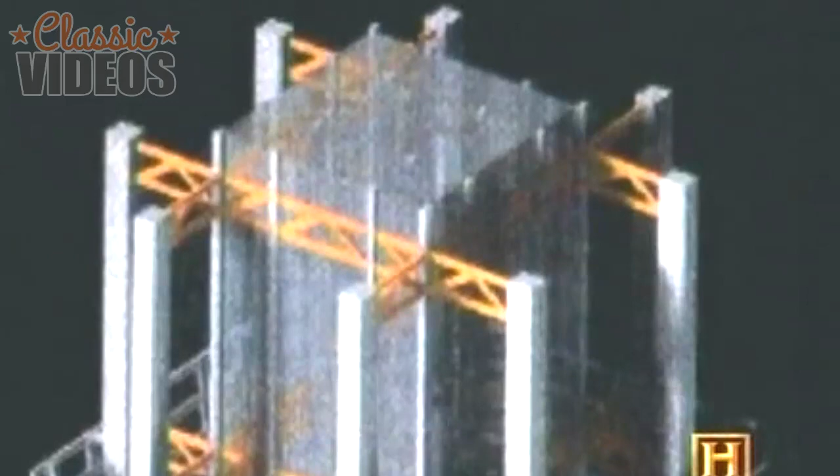These 8 super columns are large hollow steel boxes, with the biggest size being 8 feet by 10 feet. We fill in the column with very high strength concrete, and inside we also provide a lot of large size rebars. The steel is good for tension, but the concrete is very good to provide compressive strength.

In 2003, the Taipei 101 tower captured the title of world's tallest building and a great deal of media attention. At about the same time, the Caltrans building was in the spotlight as well, but for very different reasons.

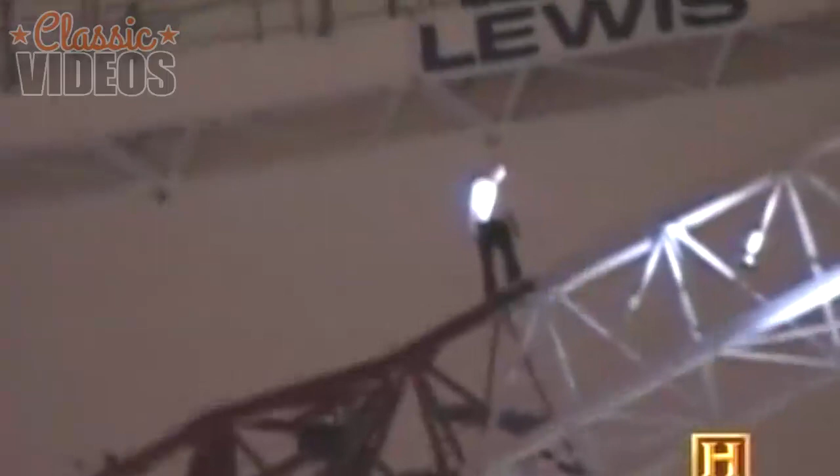Our tower crane was essentially hijacked, which made several national news venues. There was a distraught gentleman, a former crane operator, and evidently he had been drinking. He hopped over our construction fence, climbed up 220 feet of ladder, and began to wildly operate the crane.

I turned on the news at 10 o'clock and it showed the guy actually walking out on the jib with a bottle of something in his hand, waving at people and drinking. Police feared the man might jump or have a weapon, so the SWAT team was called in.

After 7 hours of negotiations, the man came down and was arrested. Fortunately, no one was hurt.

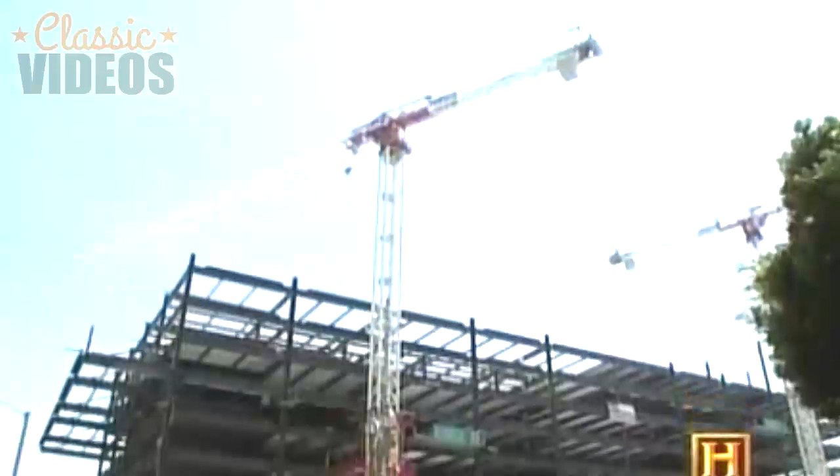Despite the interruption, steel erection continued right on schedule and the internal skeleton neared completion. When the last stick of iron goes into a building, whether it's the Empire State Building, the Pan Am Building, or our Caltrans building, it's always a reason to party.

On June 13, 2003, 10 months after excavation began, the Caltrans project celebrated its topping out ceremony. We're so overwhelmed we can't even express how important this is, but that's a big day for any construction site - this is why we usually have these parties. It's a big party with a barbecue and a much-deserved day off.

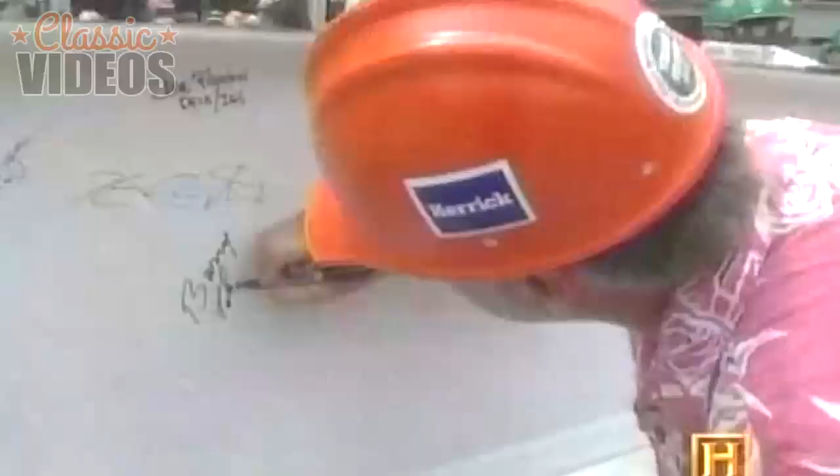The main event is the ceremonial hoisting of the final beam into position. Before it goes up, everyone signs the top-out beam.

Historically, some sites have placed a tree on the top-out beam, a custom dating back to at least 700 AD. No tree here, but plenty of Sharpies. The beam sports hundreds of signatures, representing the diversity of the people needed to get a building of this size off the ground - politicians to pipe fitters, figureheads to foremen, and everyone in between.

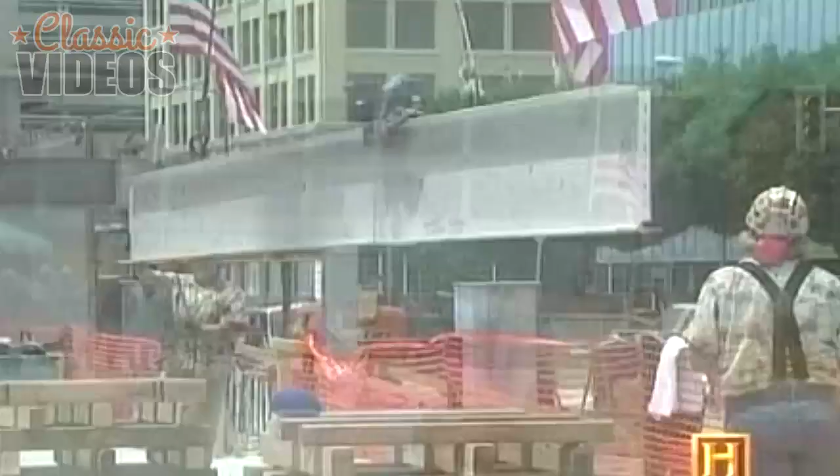Now the real work has started. Today's speaker is the District Director for District 7. Thank you, Doug. We've got to get this hooked up, because right after this speech, they want this to go. Thank you so much. And with that, the tower crane hoists the final beam into place.

It's been a big project. This is one job I'll look back on for the rest of my life and be proud that I was a part of it. Coming back a year down the road or two years down the road and looking at something you had a hand in building, there's a great sense of accomplishment there.

Although there's plenty more to do before this building is ready for elevators, air conditioning, and plumbing, we've gotten the skeleton up. The iron workers can leave knowing they've done a great job. I love my job, I wouldn't want to do anything else - unless I didn't have to work for no money. I'm proud to be an iron worker.

Brandon and Aaron have built a dozen buildings, but this will be the last one they do together as partners. We worked together for how long? 2.5 years? 2.5 years together, every day, like a married couple. I see him more than my wife.

Now they're going to separate jobs. But how are these two friends who've trusted their lives to one another going to handle the split? Will there be a sentimental goodbye? Thank God we're done. Guess not.